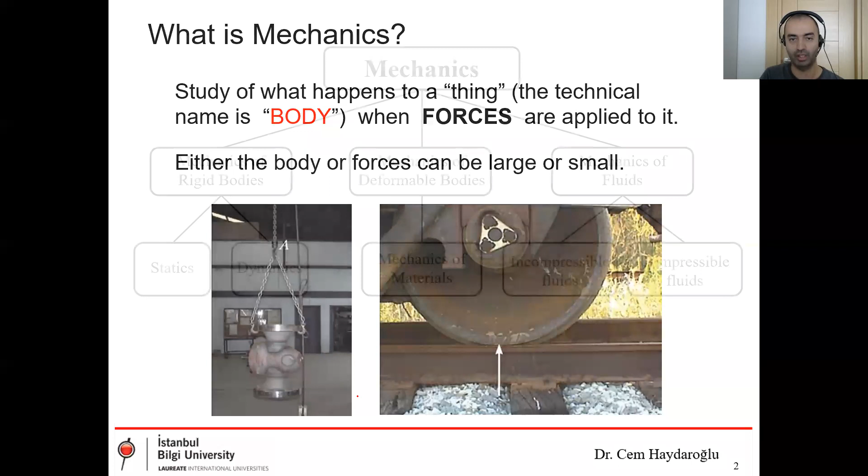This is the mechanics - this is a general title at the beginning. Now you're gonna see the breakdown of mechanics. You can see here: mechanics of rigid bodies, deformable bodies, and mechanics of fluids. Okay.

The last one - you're not gonna deal with this one. Okay, this is fluid mechanics. All the engineers deal with this, especially the structural engineers or hydraulic engineers who design the dam, because, or who design the marine structures. Okay, it's about fluid mechanics, wave mechanics, etc.

Or mechanical engineers work about this. If they design an engine, the oil, or the fuel transfer is a kind of fluid mechanics problem in the engine. So this is an engineering case. Okay, we are not gonna work on this part.

Okay, what we have at the moment: rigid body and deformable body. I'm gonna explain what the rigid body or deformable body is. You know what the body is - body is a member. Okay.

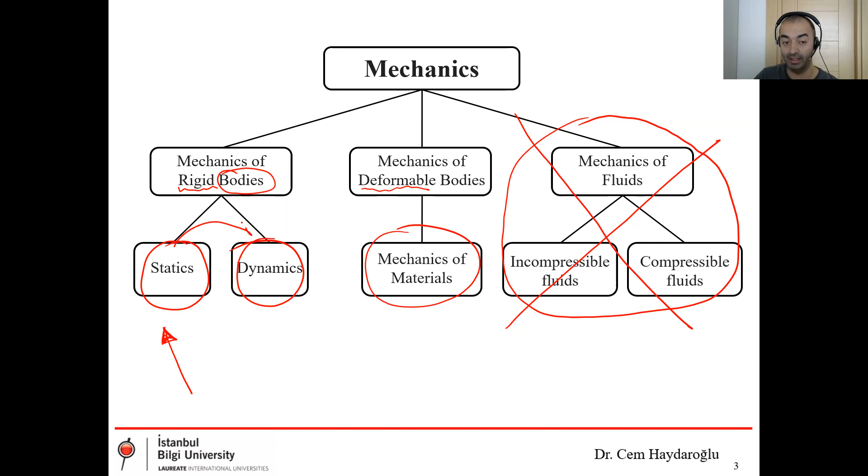So what is the name of this course? It's statics. We are on this page. Okay, I'm going to show you the differences between these two, statics and dynamics. You don't have to memorize this - I'm not going to ask about this part, but you have to imagine what we are doing.

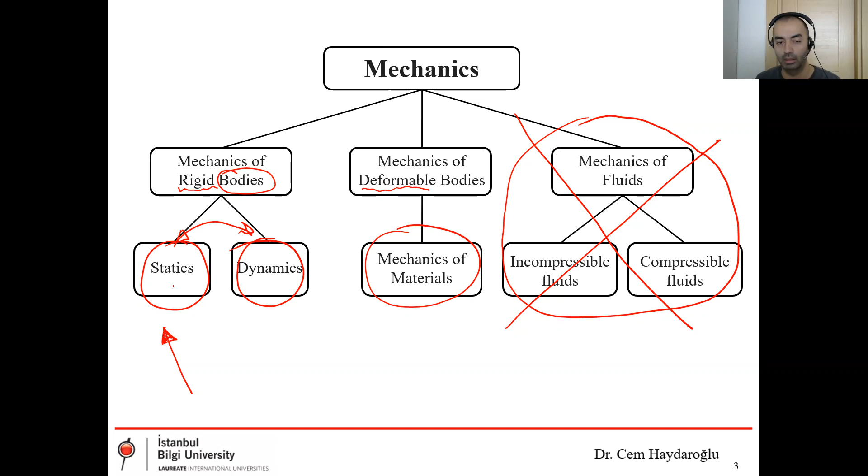Okay, let's talk about the rigid body first. Here you can see three examples in the middle line. The first one is a box or a stone, a cubic stone, or forget about the material type, let's say we have a cube. That's better. The first one is unloaded position. If there is no load on this member, there is no deformation. It stays there as its initial position. So let's have a look at the second one.

I have a rigid body. Look here, the name: I have a rigid cube. That means if I apply a load to this member, it doesn't make any deformation. It stays on its initial position. The example is stone here. If you have a huge stone, you can apply a load, it doesn't change its shape. At the end, if you apply a huge load on top of the stone, it crashes, that's okay, but I'm not talking about this crash mechanism. I'm just talking about I have a body here. If I apply a load on top of this, it's not gonna do any deformation.

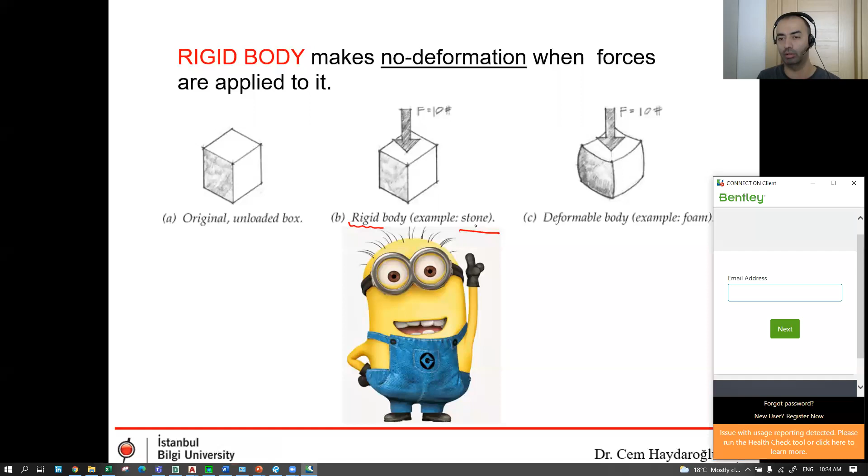Let's have a look at the last one, deformable body. The name comes from the behavior, deformable. When we apply a load on top of the member, it makes deformation. So the example for this one is foam, you know, it's a soft material. When you apply load, you can see the deformation. It's a deformable body. But here in this course, we are going to talk about rigid bodies.

Okay, rigid bodies, keep this in your mind. If there is a rigid body, it means no deformation. Is this part okay? What the rigid body is? Is this okay? Yes, teacher. Okay, I'd like to hear from you actually.

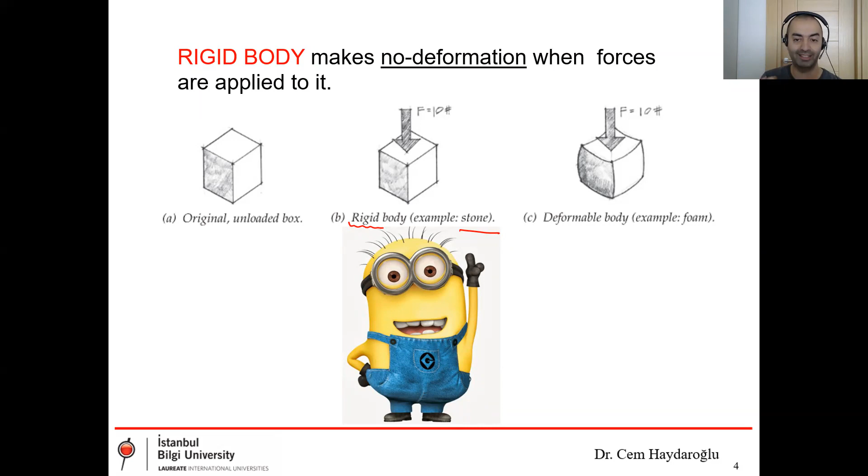We know now what the rigid body is, because I'd like to explain these small or fundamental definitions at the beginning, since in the next stage we are going to see a rigid body word or rigid member word in examples. So I will accept that you know what it is. Let's go ahead.

Okay, this is the more detailed mechanics of rigid body. We know that if we have a rigid body, we have no deformation. In the first line, if we break it down, we are going to see the statics and dynamics part. You can see the static part is dark and the dynamics part is light here because we are at the left side, but I will explain again what dynamics is. Dynamics has two breakdowns: kinematics and kinetics. But at the left-hand side, what we are gonna do: statics has forces and moments. Today, we are gonna talk about the force, what it is, what the components are.

So in the next stage, next week, we are gonna talk about the moments. I guess most of you are familiar with moments and forces if you come from architectural division or science division from high school. I think you are familiar with all these terms, but in this stage we are gonna make some different applications. The method is the same, but we are gonna do some different applications.

Okay, here we are going to compare dynamics and statics. Statics: we are going to deal with bodies at rest. Rest means, okay, here this is a surface, I have a box on this surface, it stays here, there is no movement in any direction. This means this body is in rest.

Or statics deal with bodies that move with constant velocity. For example, if this moves to this side with, I don't know, 10 km/h, its velocity doesn't change, it always goes at the same velocity. If there's an acceleration in the velocity, it's not the subject of statics, it has to be in dynamics. I'm gonna show you in the next stage here, because when we look at dynamics, it says: okay, we deal with bodies that accelerate or decelerate.

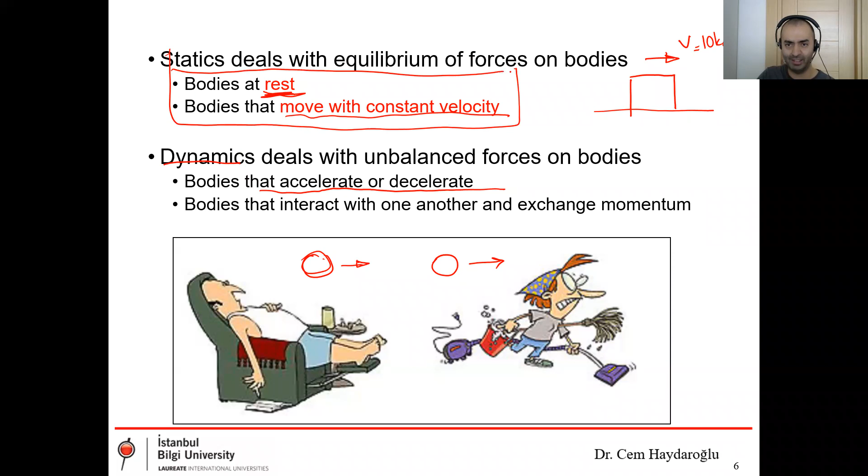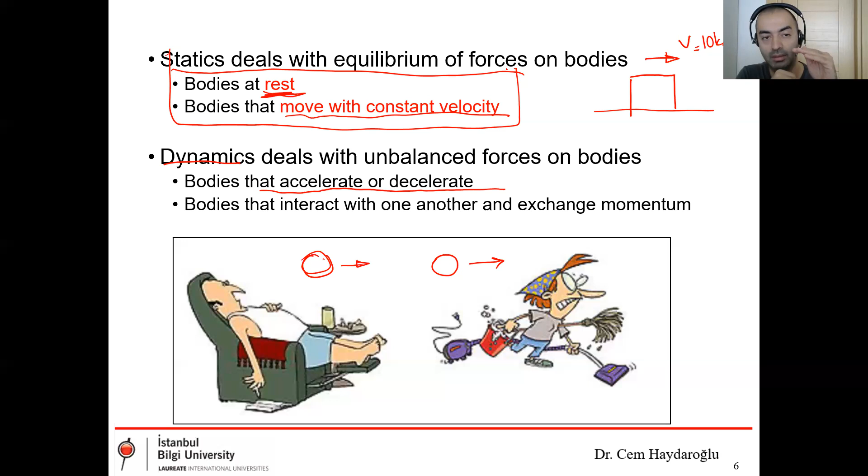In this course, we are going to deal with these two steps. I guess you understand the differences between statics. In statics, we are in a rest position or we have a constant velocity, but in dynamics, we have acceleration or deceleration and the interaction of bodies, one hits the other one, like this example.

Now we understand what we are going to do. What is statics? What is rigid body? But here I'd like to explain what is a structure. You can find these definitions in books, and you can find better definitions than this on Google. Let's have a look at the book definition first.

Structure is defined as something made up of independent parts in a definite pattern of organization. We have independent parts to make a structure. This is the philosophy behind the structure. We have independent parts, and what we would like to do is put them together in a pattern. We don't know what it is exactly - the pattern is a general definition here. We'd like to put them in a pattern, in an organization.

At the end, we would like to get a structure. We would like to carry something - this is our aim. In the natural world, what we would like to do is build the most powerful building. We would like to get the most strength while using the least material.

Stability and strength - you're going to hear about these two words in this course, in the next stage in the strength of materials course, in the next term, and also in your professional life. If you deal with a project and work with an engineer, you have to understand what the engineer says, because they're going to say always something about stability and strength. You should know what stability and strength are. Let's have a look at stability. By the way, first I'd like to explain strength - that's the easiest part.

Okay, please look at the sketch here. There is a guy over there trying to carry a weight on top of his head. So I'm a powerful guy - I'm going to carry 100 kilograms and put it like this. If I have the power to do this, that means I have the strength to carry this load. This is the strength.

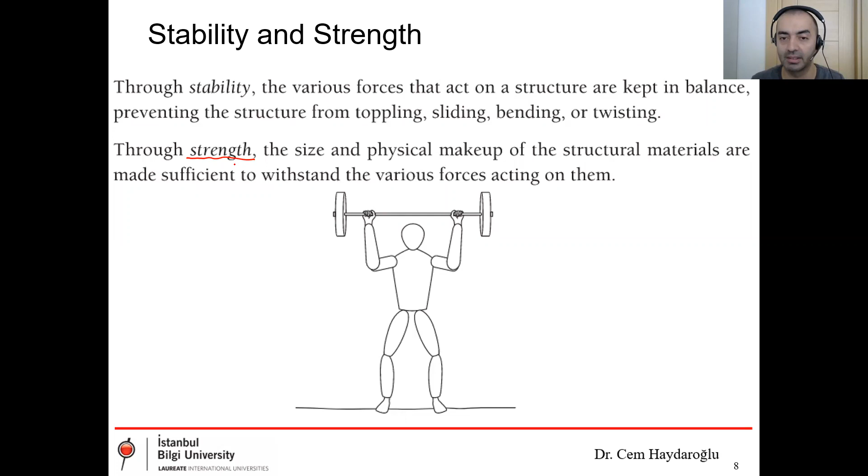Let's have a look at this one. Here you can see the stability. If you lose your stability, you can fall down like this. For example, if you lose your strength, the weight is on top of your head, you lose your strength suddenly, you start to go down a little bit like this under this heavy load.

These are the stability and strength problems. I like the sentence at the bottom: without stability, the strongest of buildings will fail. And again, without strength, the most stable of buildings will fail. So what we understand here, if we have only one of these, stability or strength, we don't have anything. It's rubbish, it's gonna fail at the end of the day.

So in our designs, we have to provide both of these cases. We have to provide stability - that means we have to provide a balanced condition for the loading condition of our structure. Because if you design a chair, your loading condition is a man sitting on the chair. If you design a dam, you have a huge water pressure behind that - it's a kind of loading.

Okay, loads - I would like to explain the loads. Actually, this is the only session we are gonna talk about the loads. In your design courses, architectural history courses, whatever, we don't talk about the loads. We have to know about the loads because we are in a war, or we are in a fight with these loads. We have to beat all of them if we want to have a good design.

Gravity loads - gravity means gravitational loads, the vertical loads, loads in the gravity direction. Dead load and live load. Let me show you some examples of dead load and live load.

Dead load, in Turkish zati yükler, or ölü yük - it's the same in Turkish. Sorry for the Turkish words, but if you have a chance to take a look at Turkish books, you are going to see these words. Live load is not canlı yük in Turkish, it's hareketli yük. Please take your notes - live load is hareketli yük. I'm gonna show you the differences between these load cases in the next stage with this sketch.

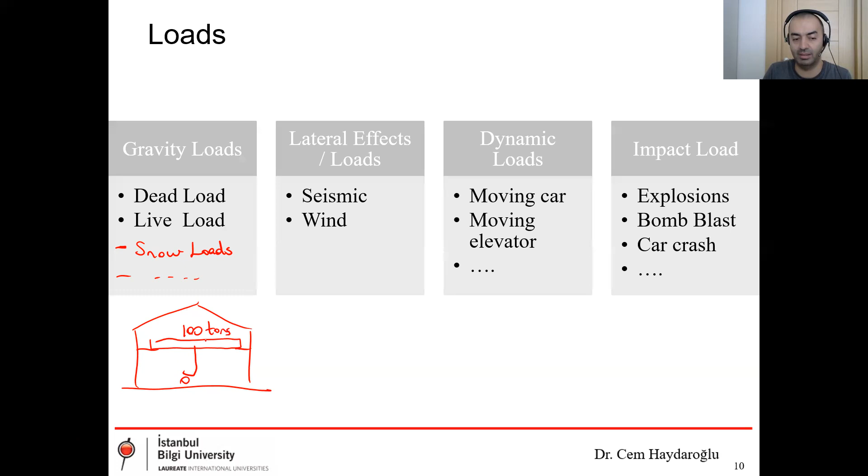There are many examples. If you have an industrial building, there is a crane inside to carry heavy pieces. For example, this is a 100 tons capacity crane, meaning this 100-ton load goes to these columns. So we have these type of loads.

In the next box, we have lateral effects and loads. Why do I say effects or loads? In the next stage I'm going to explain. We have seismic and wind - seismic and wind load, wind effects.

Let's jump to the next box, dynamic loads. For example, a moving car, or a crane - this is a different case, but you can accept this as a dynamic load. Yes, this is a kind of dynamic load, it should be in this case.

A moving car on a bridge - we have a bridge structure, and on the bridge we have a car which moves, so it's a kind of dynamic load. Or we have a high-rise building with really fast and cutting-edge elevators - this is a kind of moving load for my structure. Okay, these are the examples.

Impact loads in the next box. Explosions - let's say you have a tank or a chemical material stock area. If these materials or the gas in the tank explode, we are going to get explosion and explosion loads.

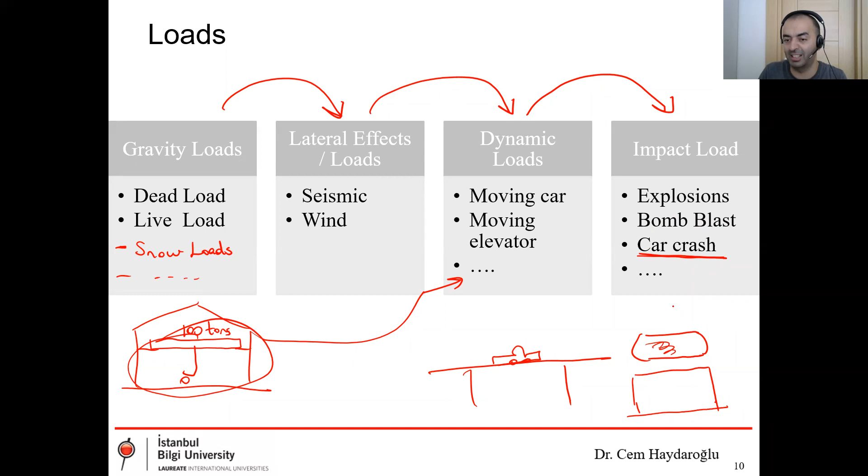We have car crash loads. We encounter these load types especially in the columns of a bridge - there is a bridge here, and a way under the bridge, and suddenly a car hits one of these columns by accident. It's an impact load on our structure, or a bomb blast, or a terrorist attack - it's a kind of impact load, because these loads occur in a short while.

So it's not like a normal load. For example, I'm a load in this building - it's not like my walk on the slab. It's a sudden impact load; it hits the building suddenly, so it gives more damage. So it has a different design method.

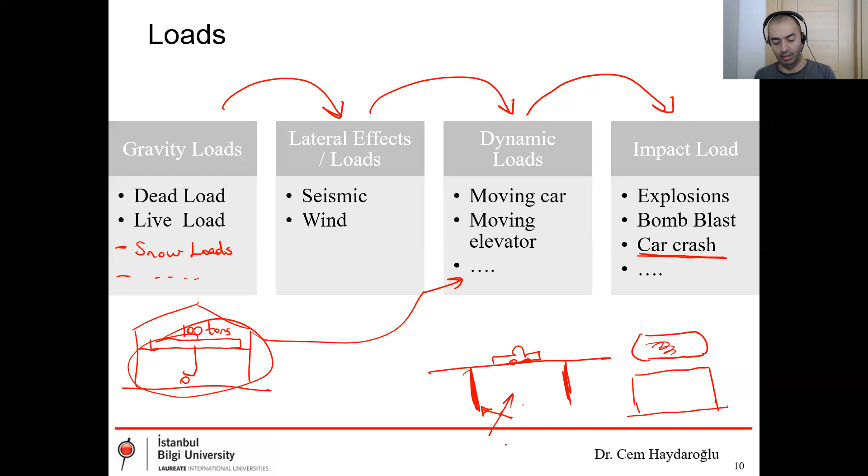Okay, but here in the big picture, what we learned is we understand the load types. Okay, let's go into detail - here, dead and live loads.

Okay, let's have a look at the left-hand side. There is a flat - you can see the wall structures, slab and beams, which are the main members of the structure. But inside there is a man, some furniture, a bookshelf, whatever. Here what I'm trying to explain is the difference between live and dead load. When you look at the table or chair in this building, is it live or dead load, and why?

What do you think? Because they can move, but bookshelves can't move - we make them stay fixed on the wall. You mean the furniture? For example, this member, and this one is live load - yeah, this is a fixed member on the wall. This is dead, right? Yeah.

Okay, now there's a main difference here. All these are live loads, this is not a dead load. What is the dead load? The self weight of the structure - the self weight of the beams, slab, concrete wall, whatever, all the structural members, this is dead load. And also if we have an architectural floor finish, this is dead load. These are the dead loads.

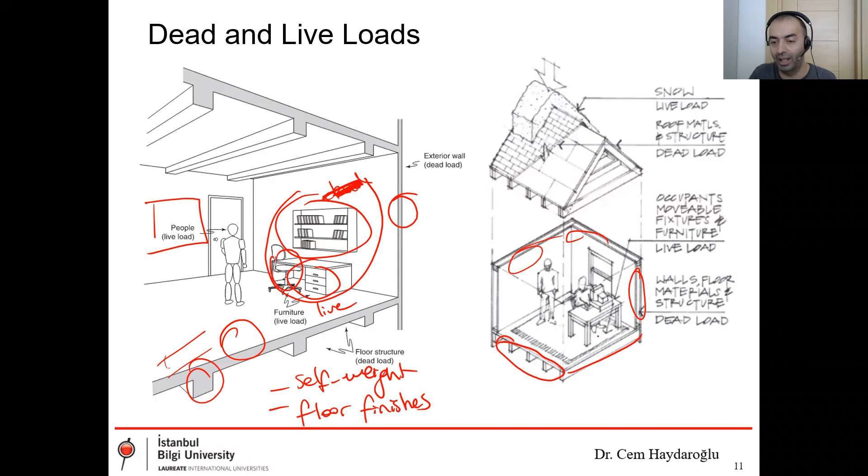Here, let's look at the second sketch - please look at the bottom one. There is a room with a guy sitting next to a computer, a table and a carpet on the ground. Here only the walls and these structural members are dead loads, and all other things are live load - even this carpet is a live load. These guys and all these furnitures, these are live.

Let's have a look at the roof. Here there is a roof structure - you can see the setup, the different layers. There's a structure, some wood tiles on the frame members, and on top of this, roof tiles. So all these are dead loads. What is the live load? The snow is live load. If a worker climbs on top of this roof for maintenance work, that's live load. Okay, and all other stuff here is dead load.

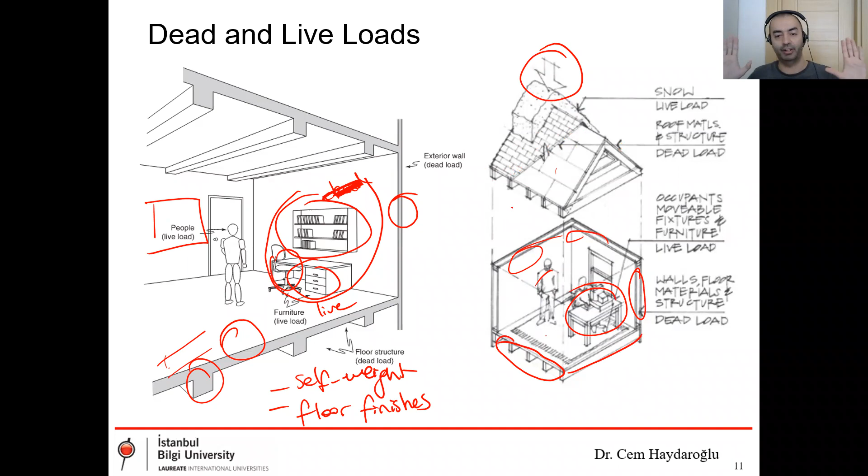Okay, question - did you get the difference between dead load and live load? Yes, teacher. Okay, sounds good.

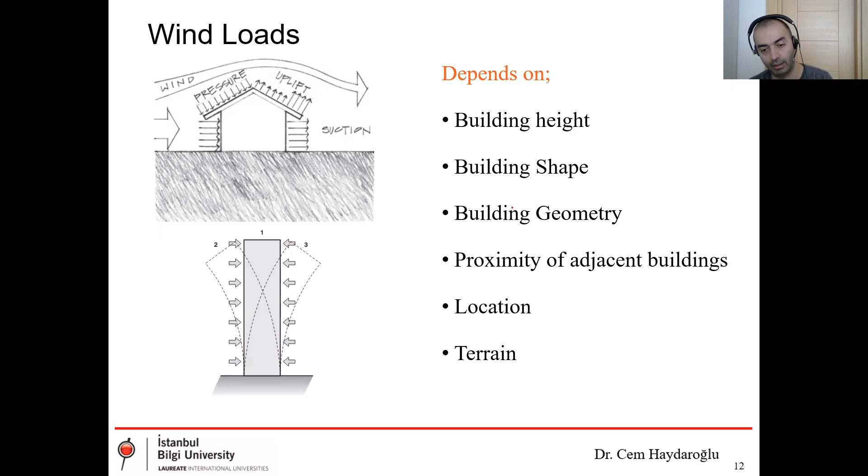If you are close to the seaside, you are gonna get more wind load. If you are on top of a hill, you are gonna get higher wind effects, wind loads. That's why this depends on location and terrain. Okay, let's go ahead.

Seismic effect. This case is a little bit interesting. I don't like to use the term seismic load. Actually, it's not a load. There is no real load on the building.

If we think about wind, it comes to my structure and hits it, so it makes a pressure on the building - it's a kind of load because there is a pressure on the building. But here in the seismic case, there is no load. Have you ever seen any load like a seismic load? No, because there is no physical load.

For example, I have this glass. If I push this glass, okay, I have a structure - there is a physical load because I pushed this glass.

In the seismic event, think about how it occurs. Basically, we have an epicenter where the earthquake starts, generally on a fault line - fay hattı. If this fault slides, earthquake starts. The start point of the earthquake is the epicenter.

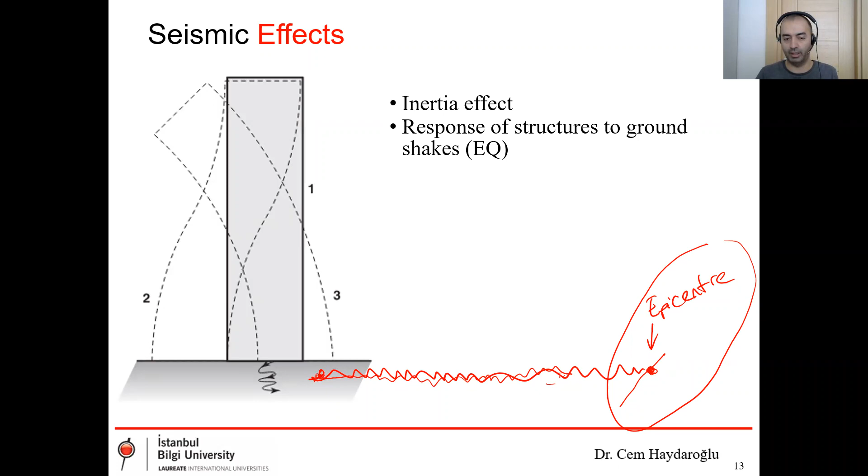From this point, it jumps to the top of the building and pushes the building to one side. Did you see anything like this? No, of course. We are now here - what does the earthquake make my structure do? It's really difficult to explain this phenomenon to engineering students as well, because what they always see in their books is a building drawn like this, with an earthquake load distribution like that.

So the earthquake is only a load for them. But I always try to explain it's not a load, not a triangular load like this. It's an effect, how it works.

The earthquake suddenly takes this point to the right hand side, for example. Or in this other example, it takes the ground to the left hand side, suddenly. The time is less than a second, like a millisecond. It's so fast.

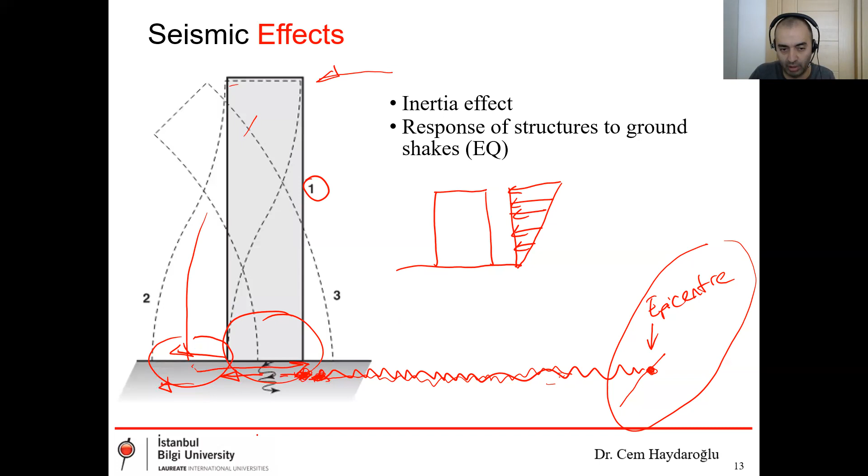And suddenly, in the second shake, the ground goes to the right hand side. This top point goes left. After this first action, the shaking starts, and this wave, this energy, only gives an acceleration to my structure.

So basically, you know this equation - it's a really basic equation. I don't want to explain more detail about these calculations, but it comes to Newton mechanics. You know this is the mass, and this is the acceleration.

So this action starts, this shaking starts. During this shaking, the ground gives my structure an acceleration. If this acceleration makes some inertia forces in my structure - mass times acceleration, which is the force - this gives or makes an internal force in my structure. There is no load at the perimeter of the structure. This seismic load occurs due to the acceleration on the ground.

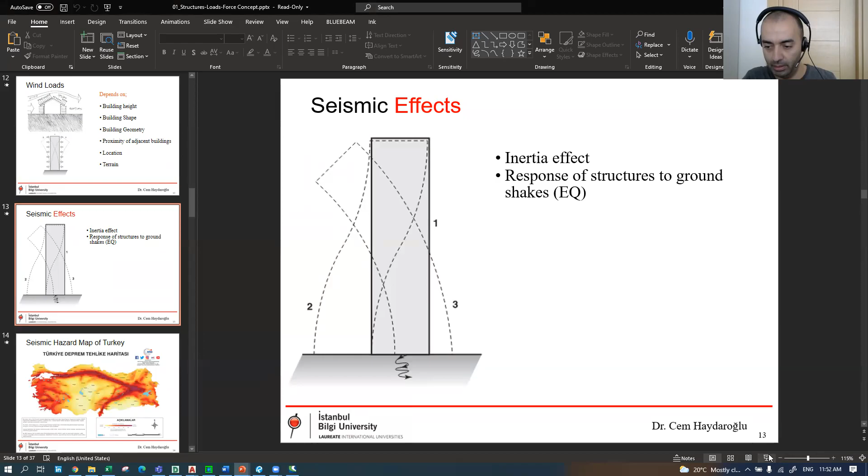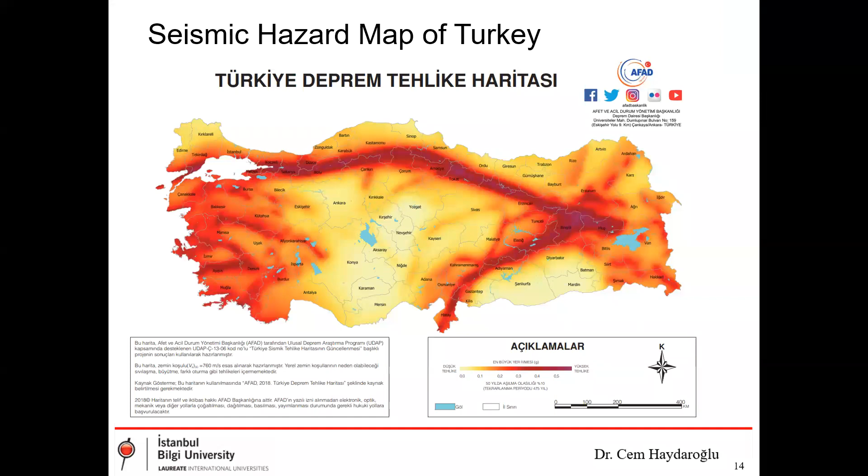I think I gave this seismic hazard map of Turkey for you. I hope it gives you an idea about the seismicity of the regions or cities in Turkey. Here you can see this map on the website of AFAD, and you can see the red or dark red lines - these regions are mainly the fault line zones. This part is the famous fault line, the North Anatolian fault line, and there is one more big line here. They intersect with each other around this region. You can see the seismicity in these regions is really high.

And if we look at the Aegean side, the west side of Turkey, you can see this part is reddish. There are some dark red regions, which are the fault lines. Around here, there are different faults in the ground and in the seasides. You may remember last year's Izmir earthquake - it was in the sea, occurring next to one of the islands over here.

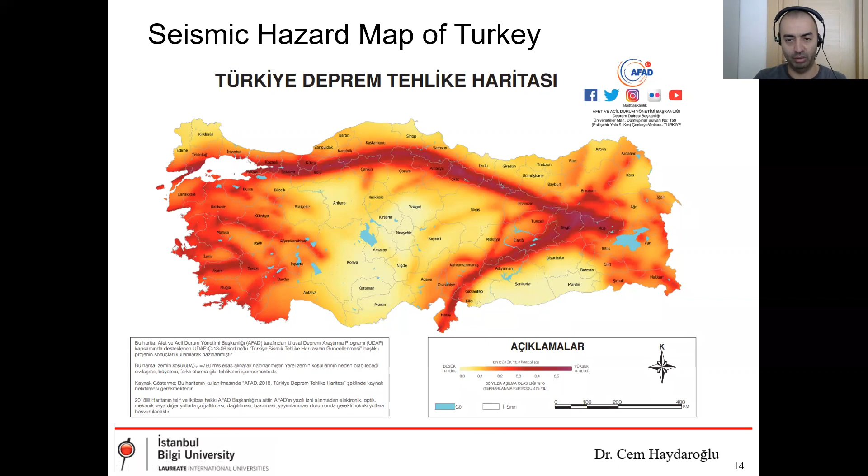So why am I showing this map? If you design a building, maybe you'd like to see or remember the seismicity of that region. You can just take a look at this map.

The interesting equation we have here is the seismic risk. What is it? It has two components: hazard and vulnerability. What is the hazard? Hazard is made of nature, actually - it's a natural thing. We can't change the hazard in this risk equation.

If we have the North Anatolian fault here, we have that - we can't change its location. So what we can do to change the seismic risk is deal with the vulnerability. It's about our design, our building quality, our structural quality, or our material quality.

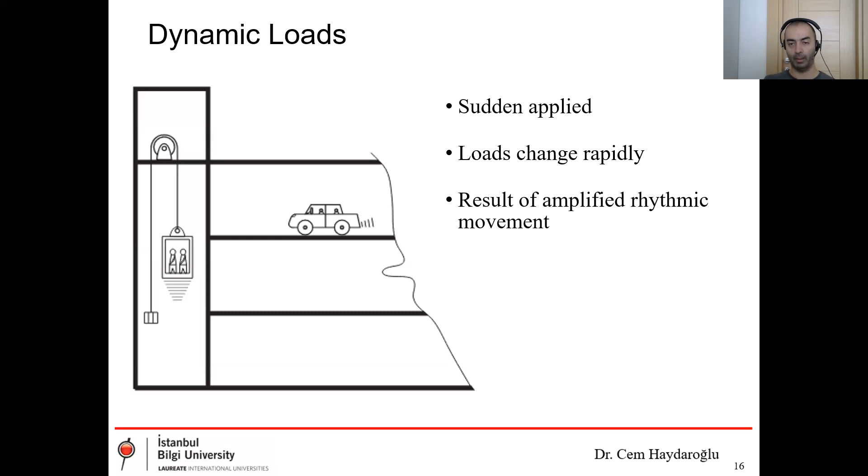So, dynamic loads. What we did so far: we discussed what is the structure, what are the bodies - rigid body, deformable body. We discussed stability and strength, and what the differences are. Then we tried to understand load types - we have different load types, and we tried to explain what they are.

By the way, in the chat box there was a question about doors and windows - you have a door frame or window frame, and you asked, are these dead loads or live loads? I guess you can change the window frame or door frame in the next stage whenever you want. So if we think of it that way, yes, it's a live load.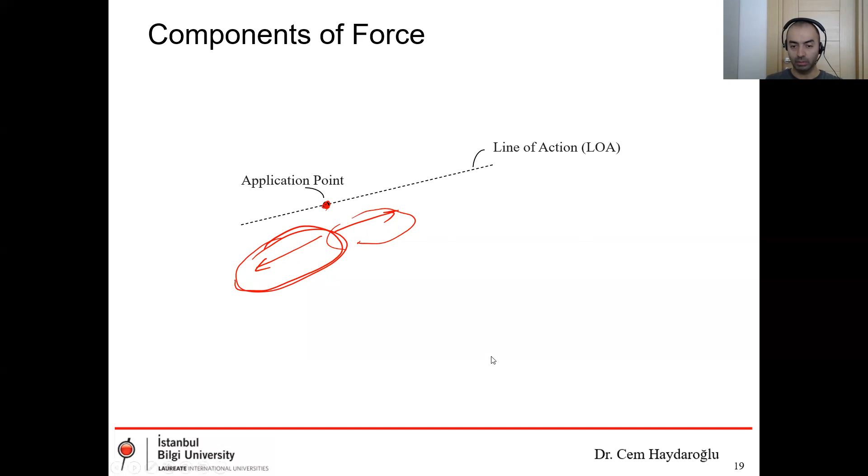Okay, there's one more thing missing - what do you think that is? The next one is magnitude. So I have the application point, the direction, everything, but the magnitude is important - is it 10 tons or 1,000 tons? There are huge differences, so we have to know the magnitude to define a force.

What we have as the components of force: line of action, application point, direction, and magnitude of the force. We have to provide all four of these to define a force - that's the thing we have to watch out for.

Principles of statics - what should we do? Force is a vector, which means we cannot do any scalar calculation. All our calculations have to be vectorial calculations. This is the most important point of our calculation - we don't make scalar calculations.

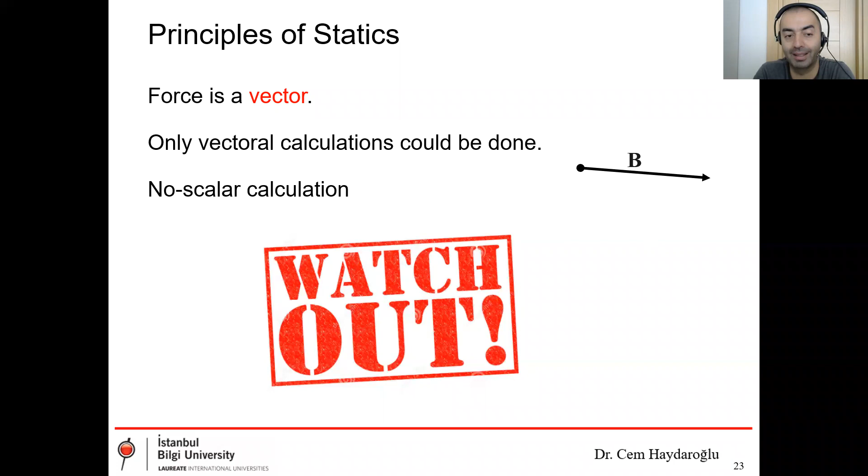Vector operations - let's remember the vectorial operations. I guess you remember this from high school, but I'd like to remind you again. For example, we have a force A, with its direction shown here. If we have negative A, or minus A, it means a change in direction, because all these are vectorial calculations.

If we have a negative sign, that means we have to change the direction to the opposite side, okay.

Here we have a vector which is a. If we like to calculate 2 times a, if we multiply this vector with a scalar number, what do we have? Its magnitude gets double. Its magnitude, direction is same, as you can see. Application point same, LOA same. Everything is same, but the magnitude doubles.

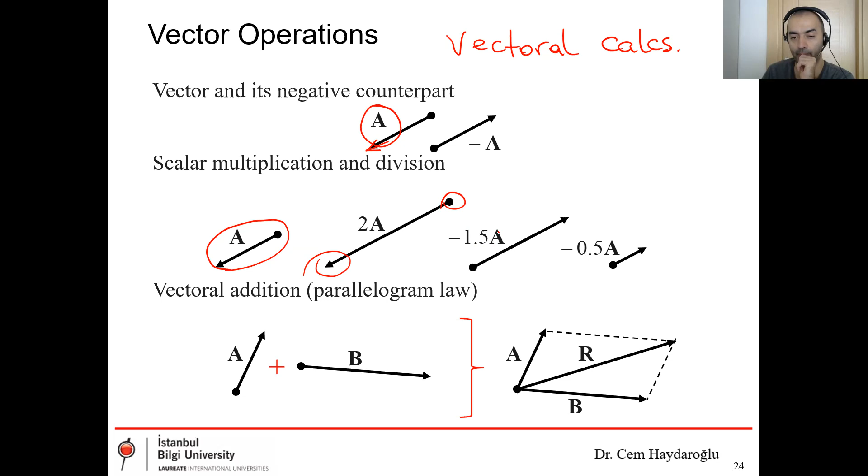So another example here, I have minus 1.5a. If I divide this vector by a scalar number 3, for example, what am I gonna get here, I'm gonna divide this number by 3. It's gonna be minus 0.5. There is no change on the direction here. And by the way, if we think about a is here, minus means the direction is changed, and then 1.5a, the magnitude is 1.5, and it's the same for minus 0.5a. Direction is changed due to this minus, and magnitude is half of the a at the initial position here.

This is the scalar multiplication and division.

Vectorial addition. What we do, if we like to sum this a and b vectors, we don't do, for example, this is 2, this is 3, we don't do 5. This is a scalar calculation. Here we have to consider the direction, magnitude, to calculate the summation. What we do, we connect their start points to each other with the directions, as you can see, and complete it to a parallelogram. And if we connect the start point to the end point, we are gonna get a resultant force, which is the summation of these two A and B forces.

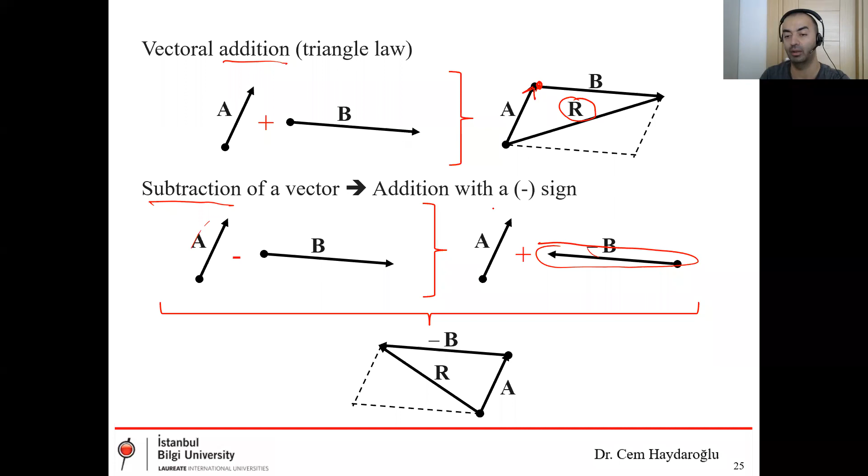Force shift method. As you can see here, the gray member is a rigid body. Rigid body, what was it? You can remember, rigid body means no deformation under any loading condition. So I have a load here which acts on this point. I have a rigid body, so you can see LOA, which is the dotted line here.

If I change the location of the force, this force, on the LOA, I can shift this force from this point to here. As you can see, this is the initial position, this is the last position. So what was the rule? It has to be on the same LOA. We are on the same LOA. We only shift the force, we don't change the location of the force. We shift the force on this LOA.

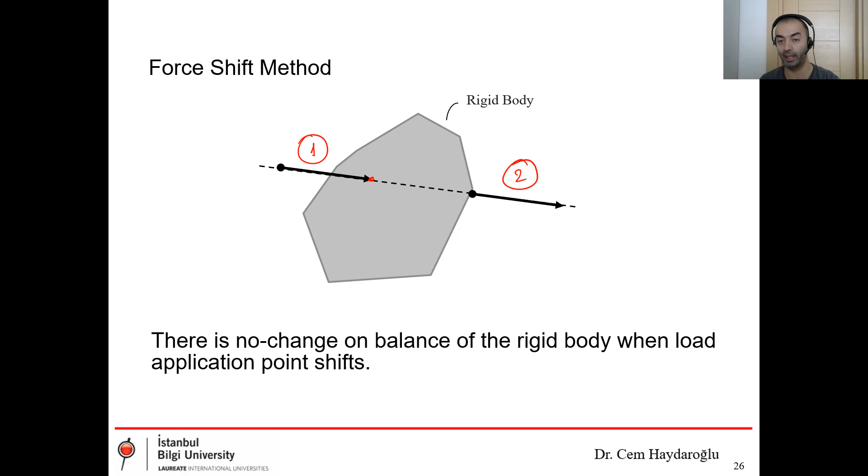So at the end, what we get, no change on the balance. The balance situation doesn't change if I do this. Why am I explaining this? Okay, there is no change, that's okay. But in the next stage, to solve more complex problems, sometimes we have to change the location of the force, so we are gonna use this method, force shift method. If I change its location on the same LOA, there will be no change on the balance of the body. This is the force shift method.

Okay, we have a rigid body again. You can see the LOA, which is the dotted line. On this LOA, I have two different forces: one here at the left side, and the second at the right-hand side. If the rigid body is in equilibrium under these two loads, that means these two loads have the same magnitude, M1 and M2. Their magnitudes are equal to each other, but they have opposite directions.

If a rigid body is in balanced condition under two loads which are on the same LOA, that means the magnitudes of these two forces are equal to each other, but they have opposite directions. This is the equilibrium rule.

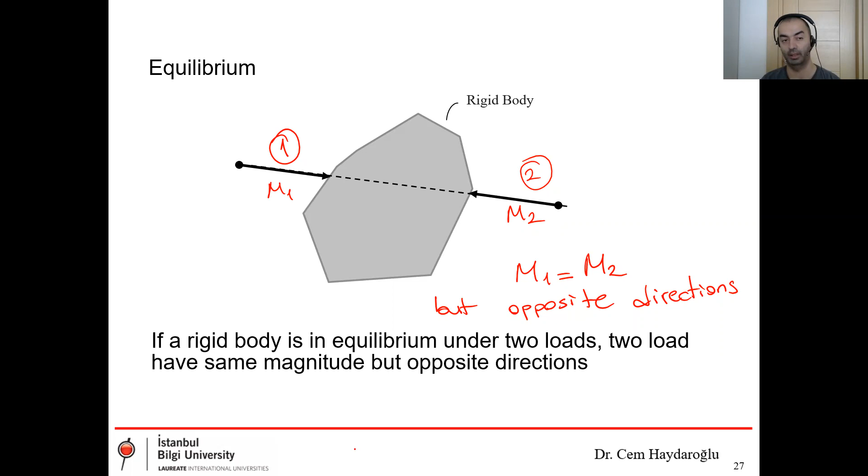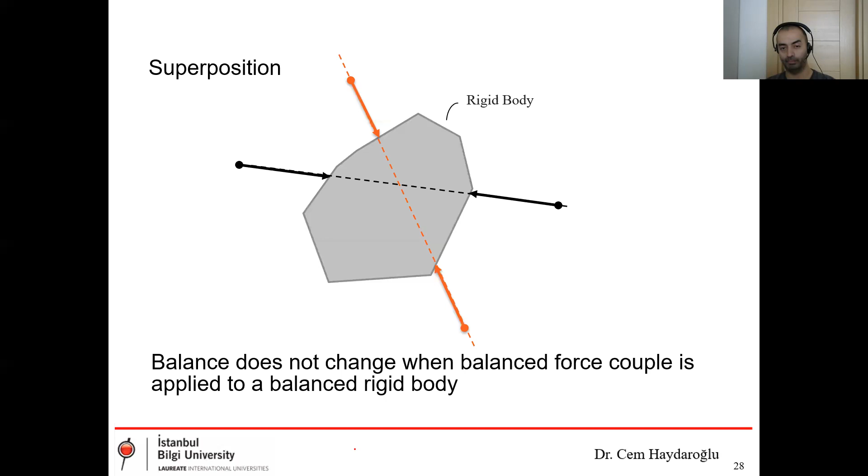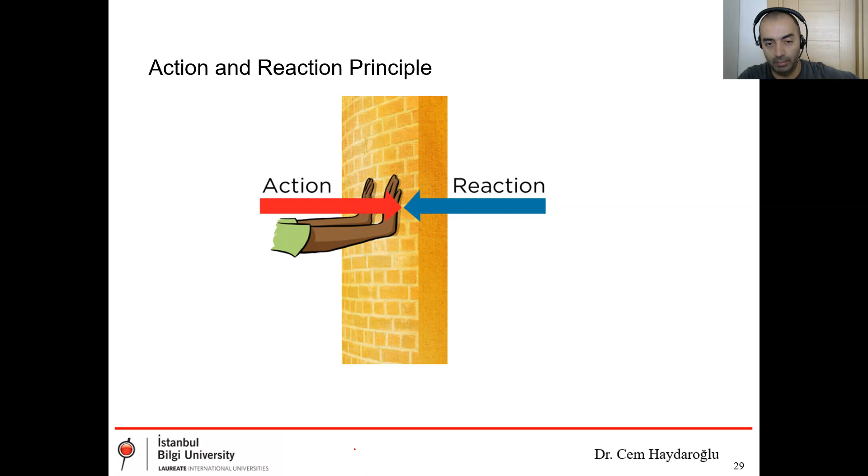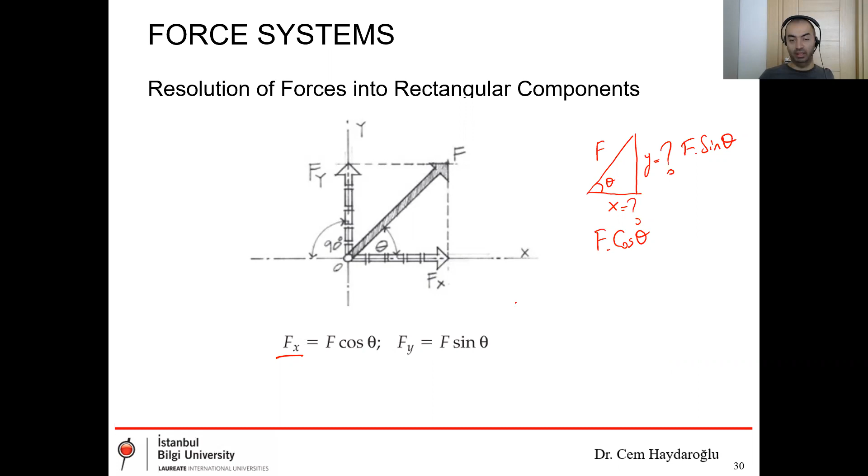If instead of a force I ask this as a geometric question, for example, I have a right triangle, I know theta, and I know the length of this member, which is F. What is X and what is Y? The question is the same here: X is F times cosine theta, Y is F times sine theta. It's the same as this geometry problem, so we are using triangles and trigonometry to solve this.

So here, let's combine this Fx and Fy. These parts are the fundamentals of force. In the next stage, we have to use these rules in our calculations, so please do more practice on resolving a force into its components, and combining forces to get a resultant force.

Please practice this. Here, let's do the opposite. We have Fx and Fy. Let's combine Fx and Fy to get the resultant force, which is F here. We are going to use the triangular method: place Fx, with its start and arrow end, then connect the second force's start point to this arrow point. We have this one first, then connect the second one to this, then connect this point to this end.

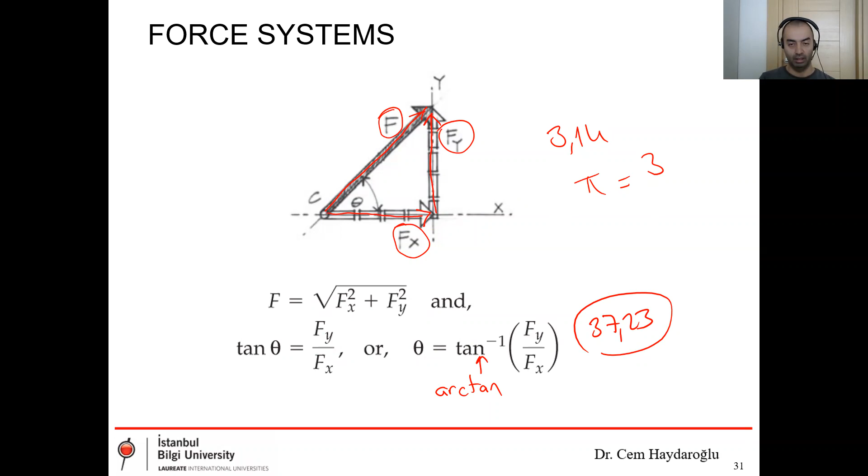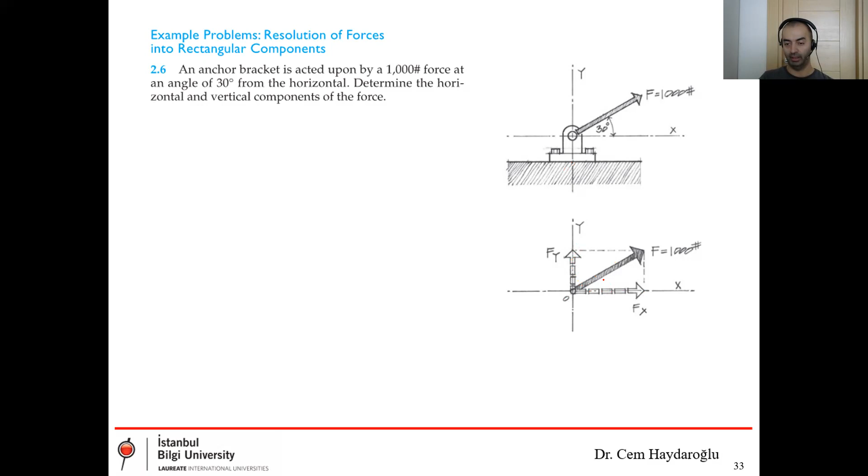We are going to draw two components, and we have the angle, which is 30. So what is this? The fx. If this is the angle, fx equals 1000 times cosine 30.

What is fy? You have to know this from trigonometry. This vertical line is the sine component of the force. So we are going to write Fy equals 1000 times sine 30.

You can see here the calculations on the left-hand side. Can you see the cosine and sine components easily when you look at the force? Is it easy for you? Yes. If you have trouble, no problem - you have to consider the trigonometry, take a look at the trigonometry part, how we consider the sine and cosine components of the lengths. So this is easy - I guess you can do it easily.

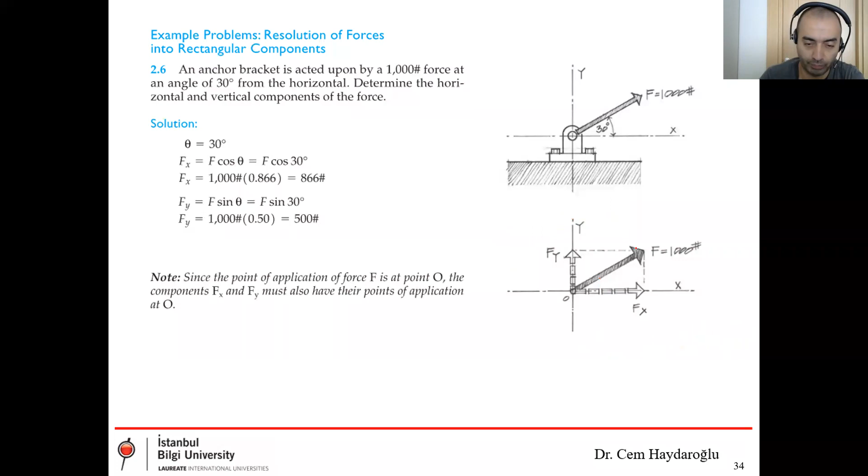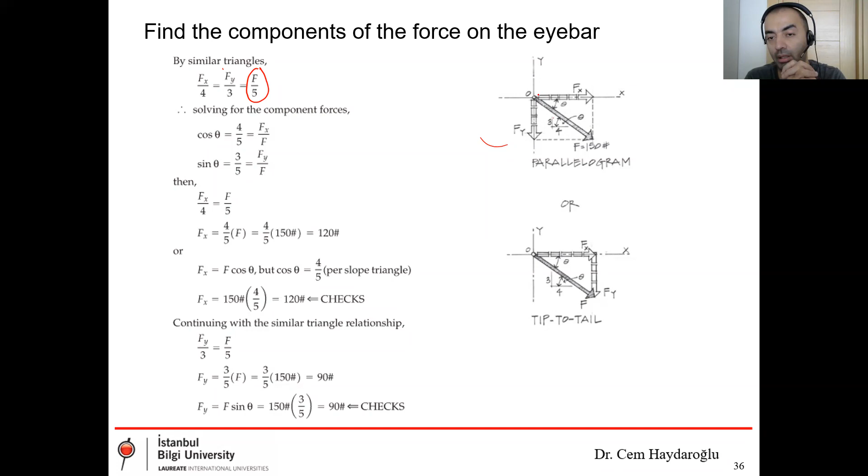Basically, go back here. What is fx here? 120. 150 over 5... times 4. Okay, this is, for example, 30.

You're right, and it's the same for the vertical component, fy. Yes, 5 times 3, right? Here 30 times 3, it's 90.

So we can resolve the force according to given slopes or angle. If we have an angle, we use sine and cosine. If we have these proportional numbers, that's okay, we can use them.